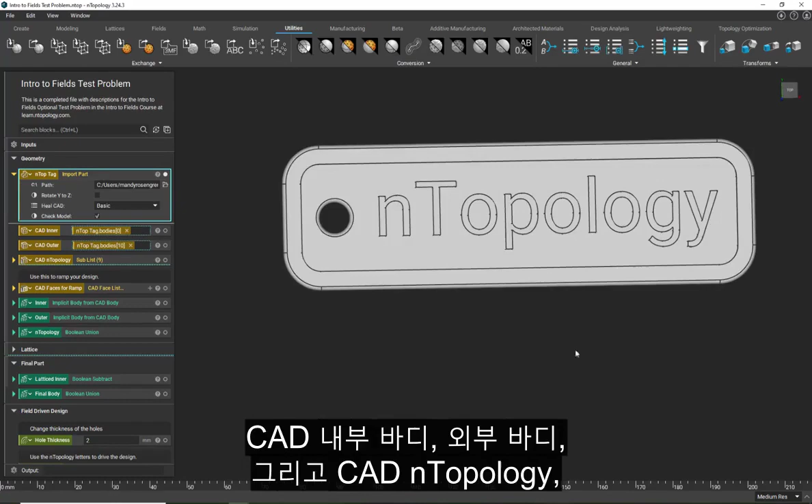In this lesson, we will walk through the answer to the optional test problem for our Intro to Fields course. You began with a starter file that had our geometry, which was this nTop tag, and you had a CAD inner body, the outer body, and then CAD nTopology, our name, as well as this CAD faces for ramp, which you can use as one of your options for your scalar field in your field-driven design and ramping.

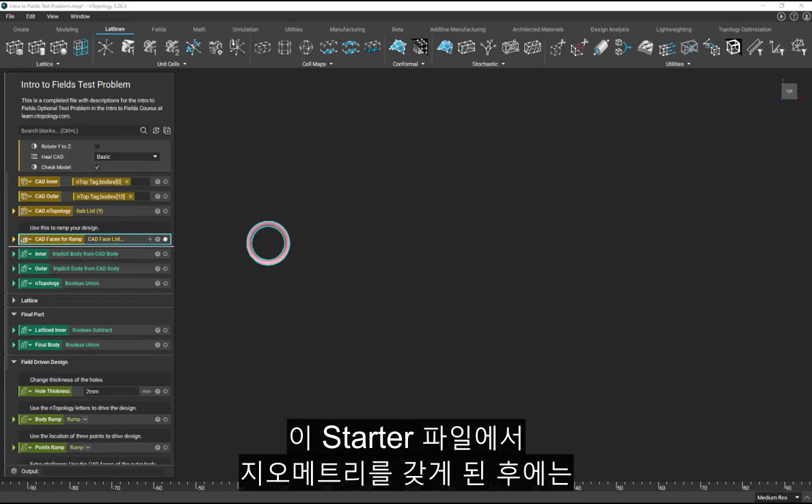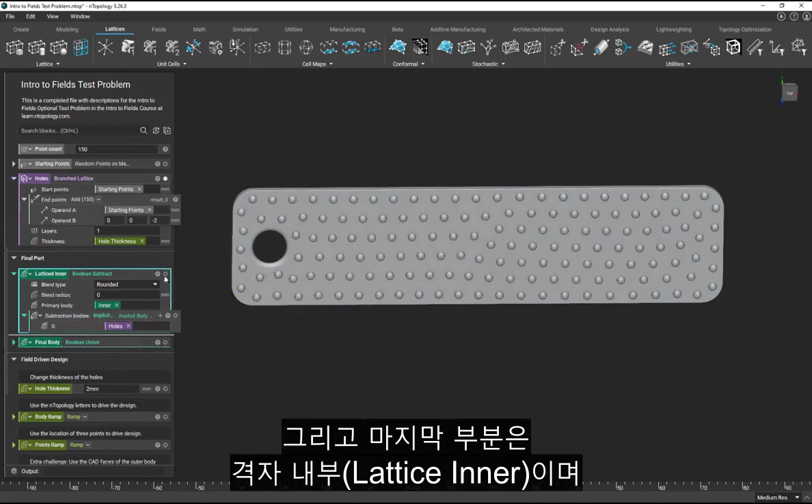So after we had the geometry in this starter file, the lattice was already created, which uses a branched lattice body. And we have it going through our inner body. We have these holes that we'll create using that branched lattice body. And the final part is our lattice inner, which is just a Boolean subtract of the holes from that inner body. And then we do a Boolean union of that latticed inner, the nTopology name, and the outer body.

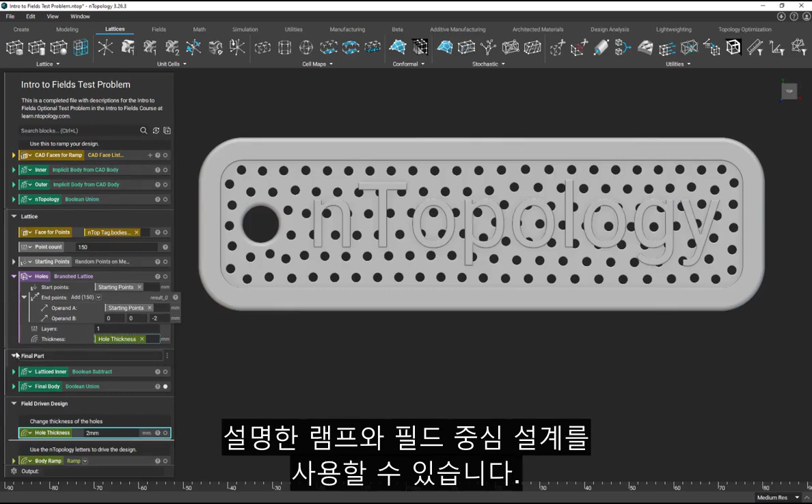So this is what we were given originally, with a hole thickness that is uniform. In order to have some type of varying hole thickness, we can use our ramps and field-driven design, which we've talked about in the previous lessons of this course. So I have this field-driven design section, which we'll use to change the thickness of these holes.

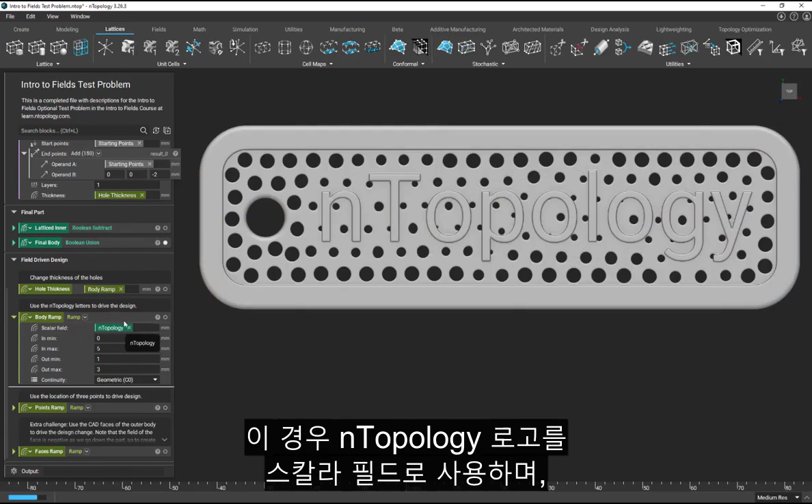The first task was to use the nTopology name to drive these designs. So I have this hole thickness as a variable, so I'll just drag and drop that body ramp and we'll see what that looks like. And what this does is I have that nTopology logo as that scalar field. I'll type F so we can see what that ramp looks like. And I'll actually turn off that final body.

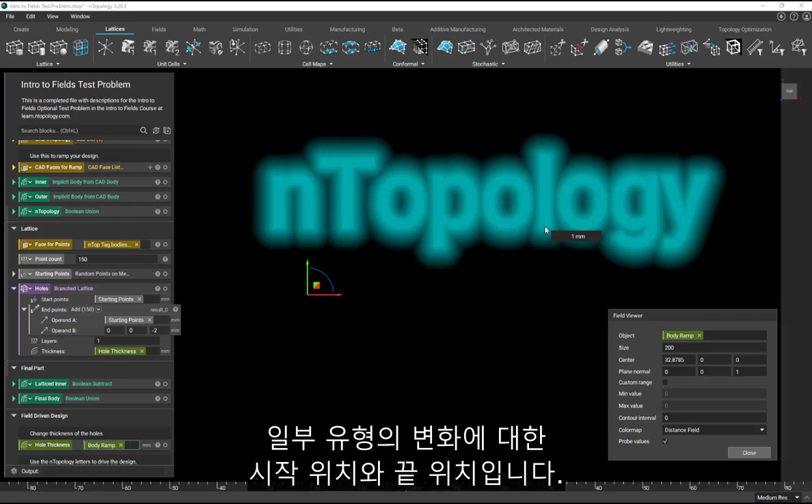And what we can see, if I probe my values, is that at that nTopology logo, we'll have that out-min of 1 millimeter. That's the thickness of our holes. And it'll increase to 3 millimeters. And the in-min and in-max is that starting location and that end location for some type of change. And the thickness changes from 1 millimeter to 3 millimeters.

So you might have a slightly different result, but something like this, where you have those smaller holes around the name and then the larger holes as you get farther away, should look similar to your piece.

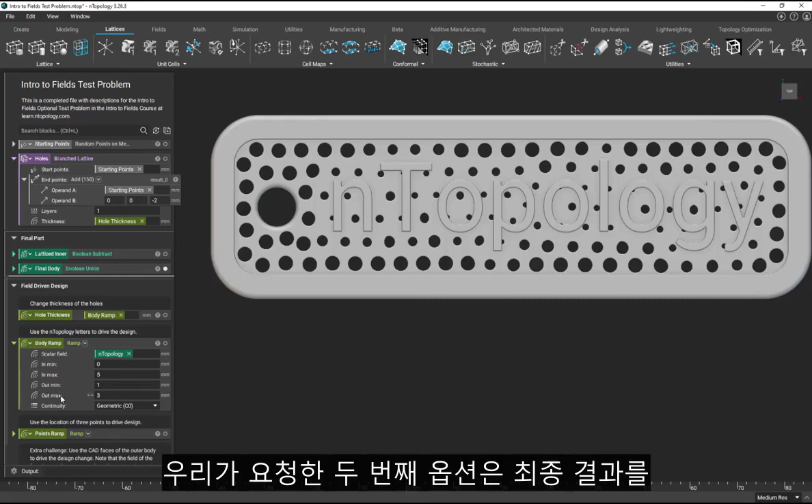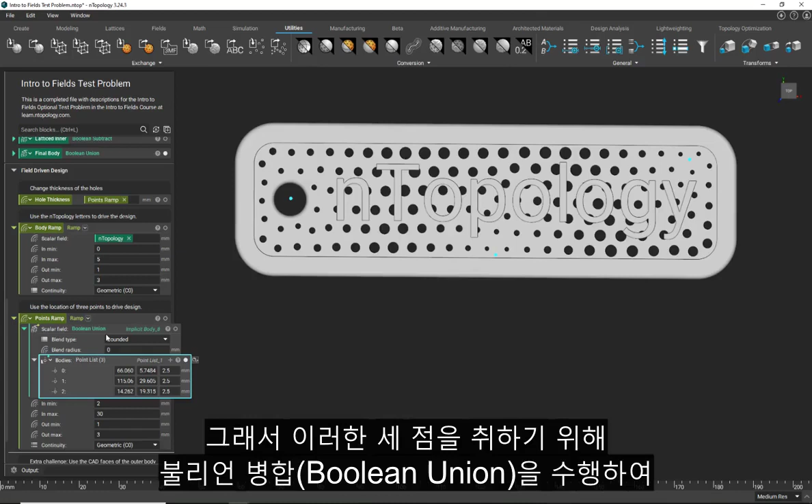The second option we asked to do was to use instead 3 points to create this design. So to show that final result, I'll drag and drop that points ramp variable, and that will apply this to my final body. And I'll also show these points, which are highlighted in blue. So I have these 3 points, and we can only have one scalar field in this ramp. So I do a Boolean union to take these 3 points and make them into one scalar field.

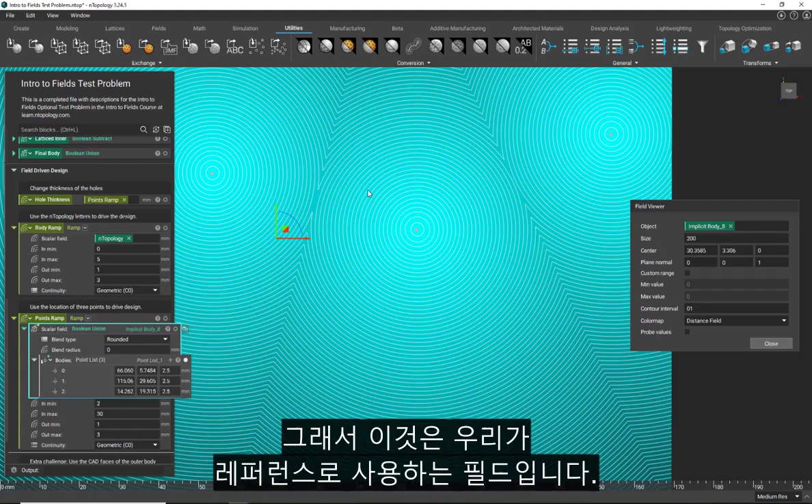If we look at that, I'll add a contour interval of 1. Let me show that. We have those circles around the 3 points, and it's going larger and larger. So this is the field that we're using as our reference. And when we're 2 millimeters away from those points, we'll start seeing that change and end that change 30 millimeters away.

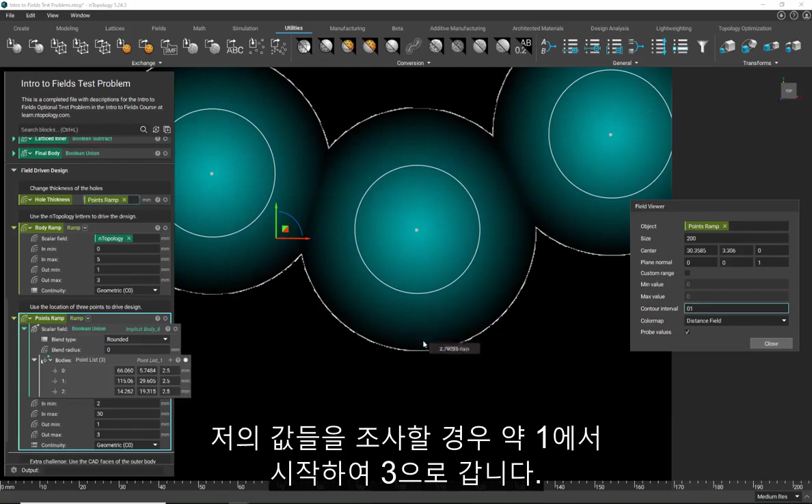So if I type F to view that, we can see if I probe my values, we start with about 1, and then we go out to 3 millimeters. And that's what we see in this final body as well. So you have those smaller holes when we're closer to the point, and they're getting larger as we're farther away. And you get a design like this.

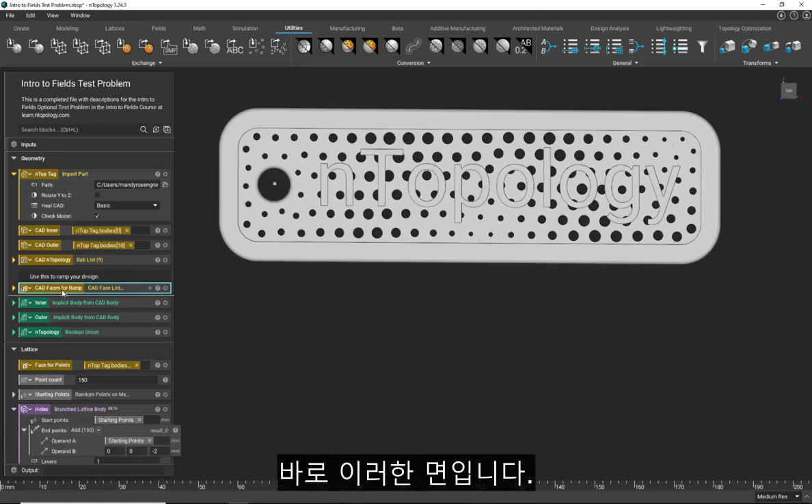The last task was to use that CAD faces for ramp that we have in our geometry section. So that would be these faces. And because it's more than just one face, we're going to convert this to an implicit body, so we have that field to work with, but we also need to stitch them so we don't have multiple fields to work with. So first I use that stitch adjacent CAD faces. So it looks pretty much the same, but now they're acting as one CAD face. And then we convert this to an implicit body.

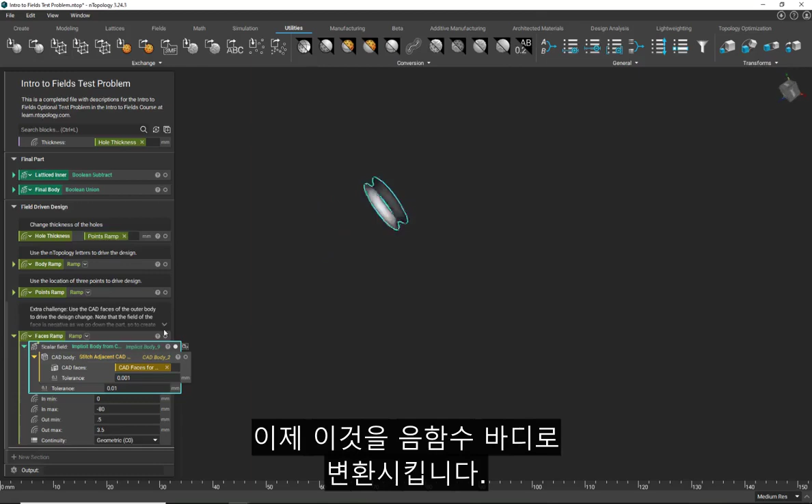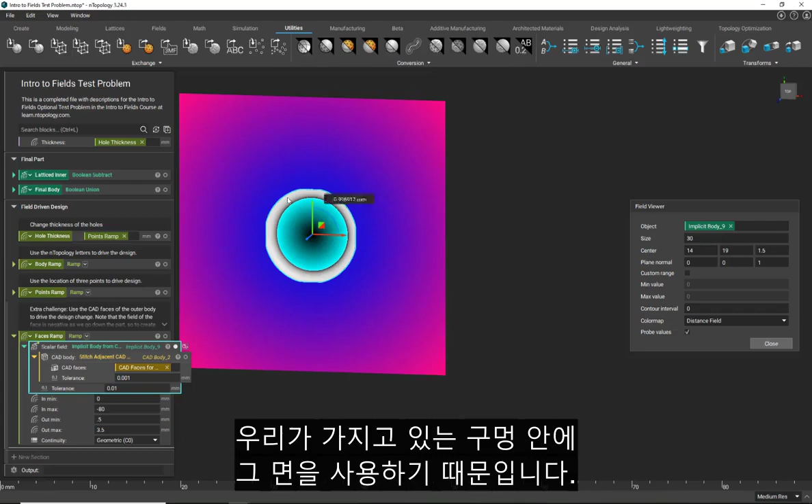If we type F, we now have this field. I'll make this size a little bit larger. And if I probe my values, we can see that anywhere going kind of outside of that face is going to be negative, inside the face is positive. And the reason for this is because our CAD face that we chose is using that face inside that hole that we have. So anywhere that's on that kind of opposite side of the face is going to be negative.

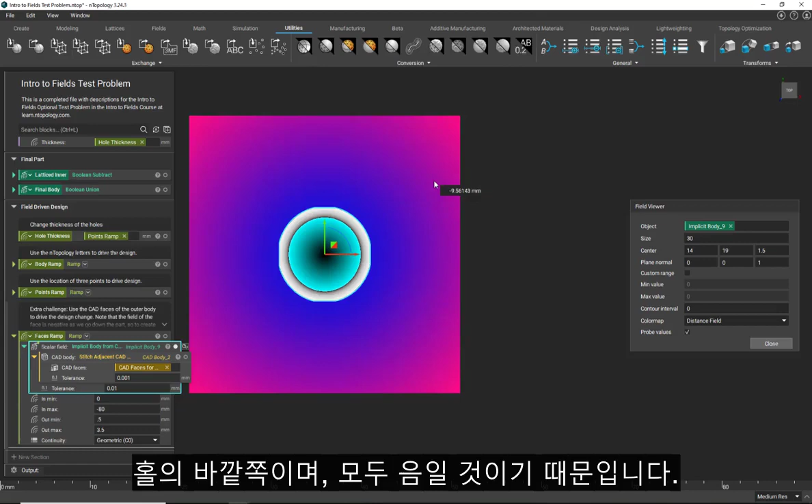So a little tricky with this example is instead of using our in-min and in-max from 0 to 80, we're going to have this 0 to negative 80, because where we want to see that change, which is outside of that hole, is going to be all negative. So let me place that faces ramp into that hole thickness and view this final body.

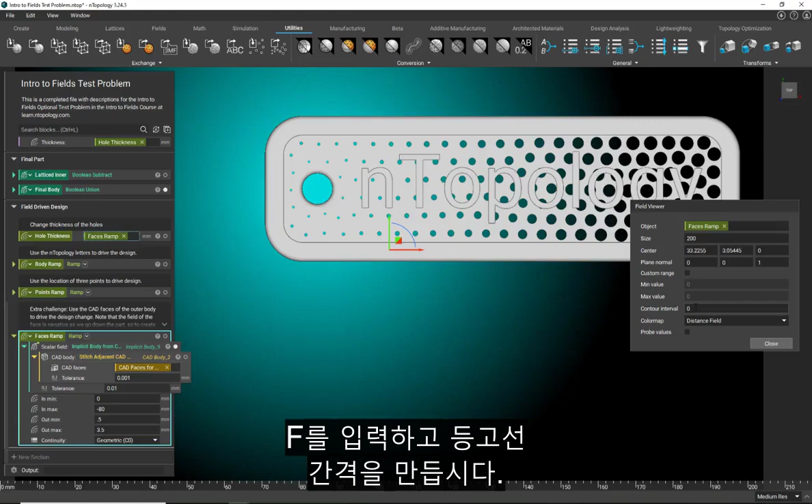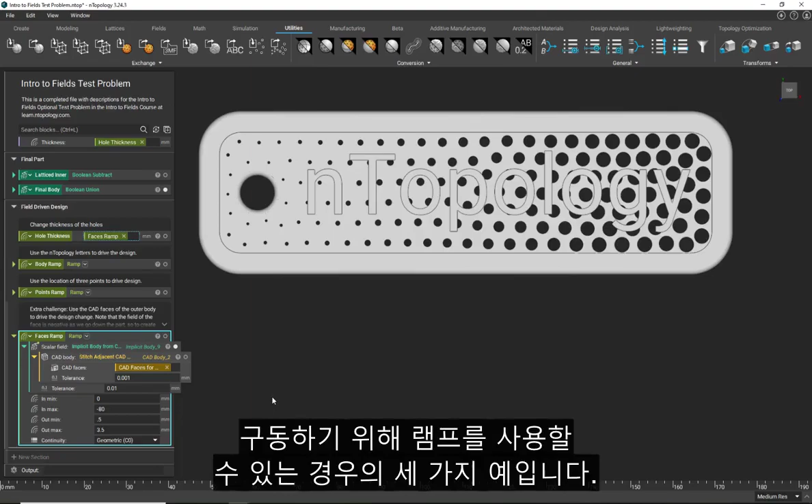And we can also turn on that field for the faces ramp. Let me type F. And let's make our contour interval 0.5. If we probe our values, we're going to go from 0.5 and then increase as we go farther along to 3.5. And you can see that in the hole sizes as well. So those are 3 examples of when you might use our ramp to drive something like that beam thickness in this problem.